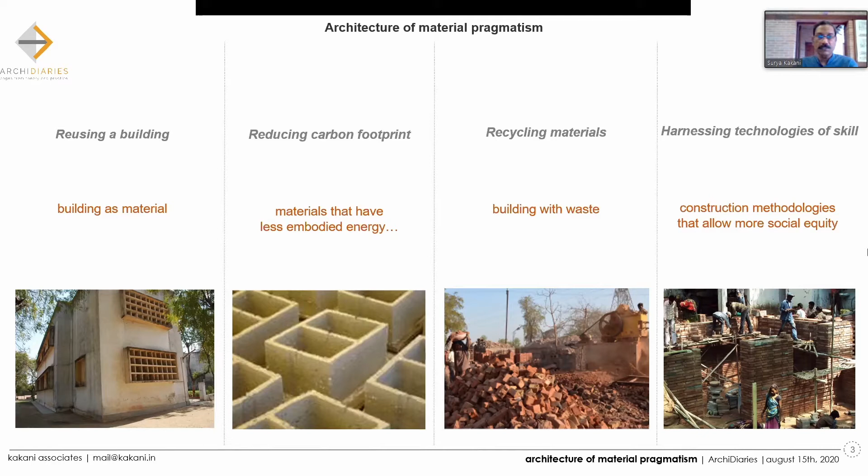Do we get it industrially produced, which definitely has a value of its own in terms of certain efficiencies of scale, but there are at least 60 to 70% of construction that still could use skill which is embedded in our culture. So I'll start with the first one, and for every particular title I put together a couple of examples.

So I'll look at these examples, explain these examples, and hopefully it will express some of the concerns that we've tried to embody in the practice.

So this is a project called the Venture Studio, in Ahmedabad University. There was an old building in the university, a very classic old building in the sense that it's a modern classic, a 1950s load-bearing building, quite large.

If you can see my mouse, this is the old building here, very close to CEPT University, in the Ahmedabad University area. At the back of the building there was a portion which wasn't being used, and the University wanted to set up what is technically called an incubation center, which they called Venture Studio.

We were asked to see if they could put this old building to use. This first slide you see is the old plan, and what we did was build a plinth around the building.

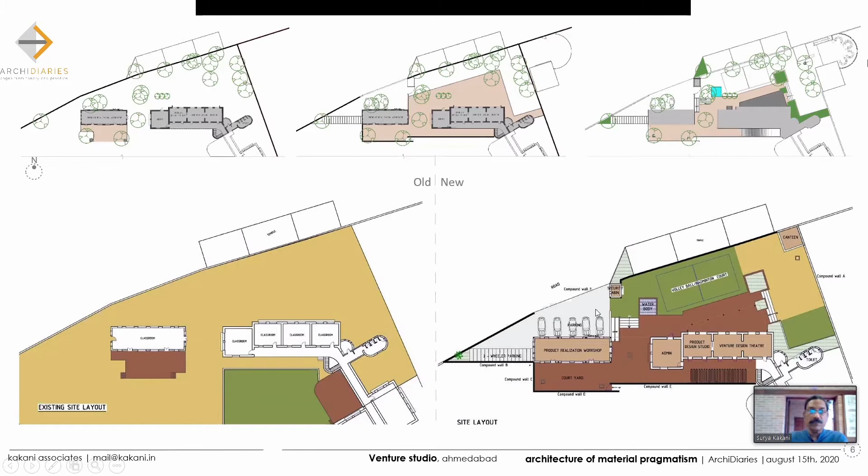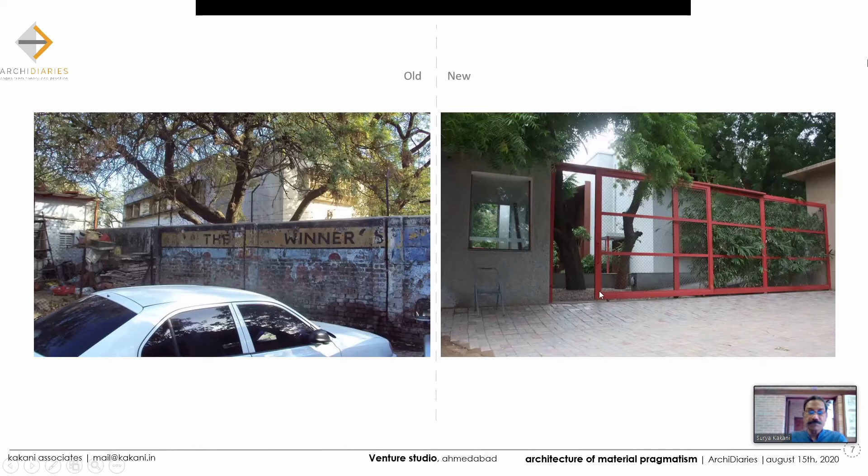The left side is basically the old shot, and the right side is the new shot, a similar close-up. So there's a plinth that comes up, and a shade that comes up on top connecting the upper floor. As you go forward you'll realize we've opened up the windows on top to look down into the lower floor - it's more like a veranda, creating a double height connecting the two floors, useful in an institutional setup.

A small entrance was created, with a small chhaja put up, making a small entrance to the office.

So this is the old building, which had a beautiful jali. This old building was done by the very famous Ahmedabad architect Atmaram Gajjar, who has to his credit some of the most beautiful buildings of the 1950s, one of the largest practices in Ahmedabad, with solid load-bearing buildings that had a certain repose in the way they stood.

Now all that we did to this jali was paint it deep maroon red. It's on the west of the facade, and it has beautiful light on the inside.

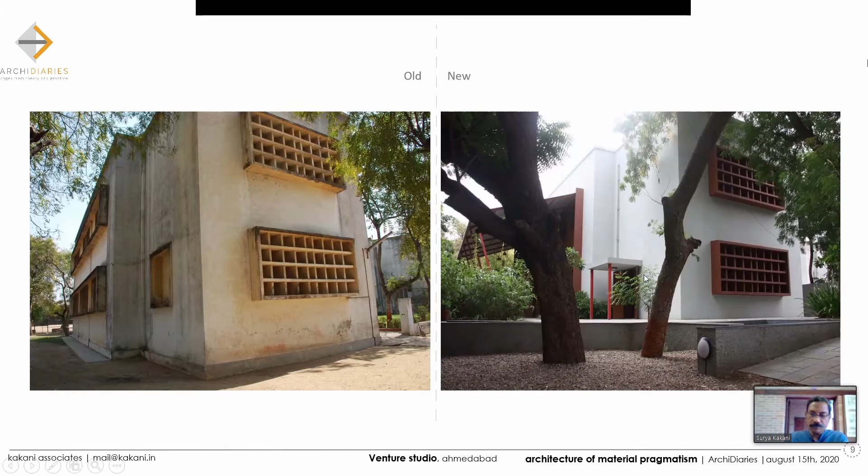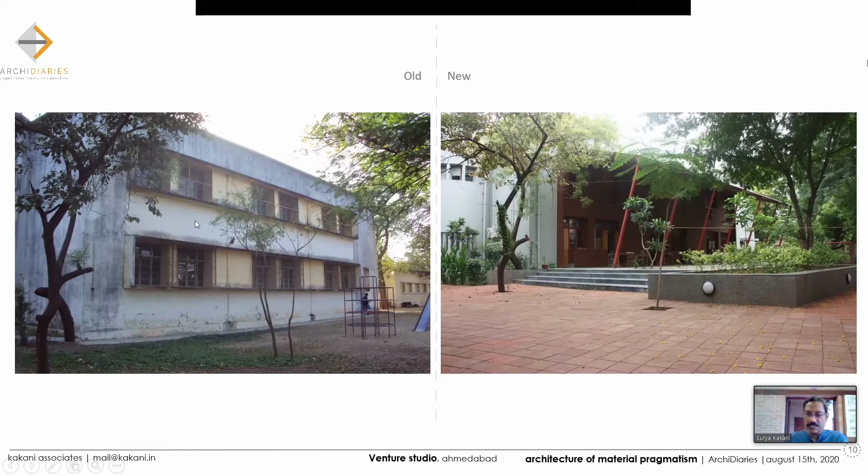As we move forward, it had a typical chhaja that went around the windows. We put a shade on the top and removed all the chhaja, taking advantage of the top chhaja to extend a shade. On the plinth, the upper floor windows were pulled down to the slab, and they could open up.

This is the court, which was originally the court, now the back for this building. We raised the level of the ground to meet the corridor, so the corridor extends and doesn't become a linear space, but becomes a rectangular space that is useful.

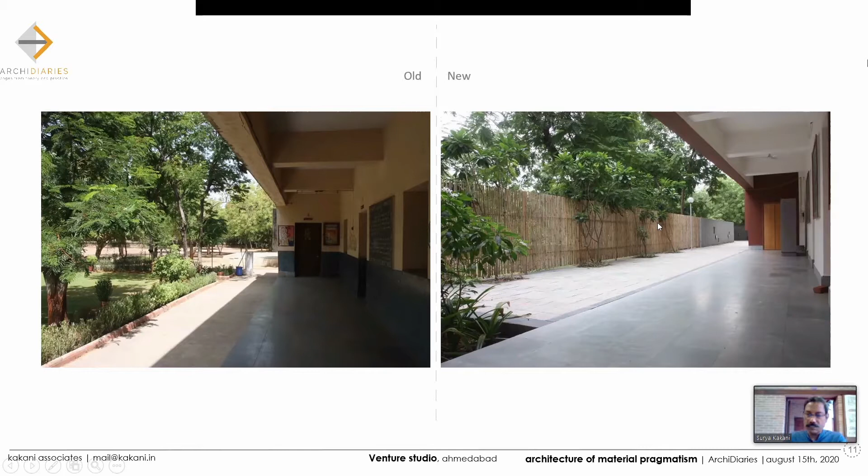In winters, this is the south side space, so you'll find people sitting here to work. We made a small bamboo jali that cuts this off from the other parts of the university for security.

So this is what I was talking about earlier, the upper level windows which open out. This shot on the right is the lower level, and this shot is the upper level. If I go forward, you'll realize what we've done is basically open up the windows.

To become part of the veranda created on the north side. The old windows were reused - they are metal windows, which we reused and just put doors in that.

So this is the inside shot of the room, and this is how it now looks. On the lower floor, it opens onto the veranda directly, so you can access the veranda. On the upper floor, you can overlook the veranda, so there's a connection between the upper and lower floors. This is how it was and how it is now.

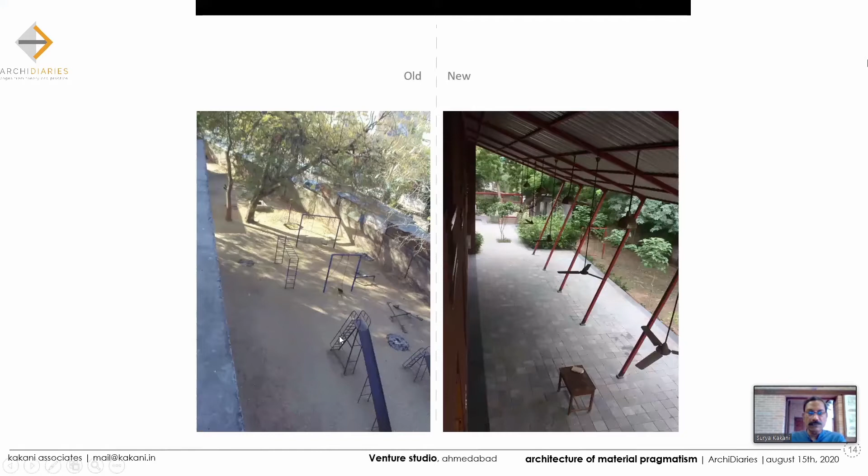The next is our own house, an old house, about 1980, early 80s to late 70s. Housing board construction in Ahmedabad, basically parallel walls, a simple box, which we stayed in for about 10 years. We redid the house since it was in bad condition. We strengthened it a little and reorganized the functions of the place.

On our north side, we had IIM as our neighbor, so we opened up the house onto the north. We made a court out of the compound wall. Basically, the margins, in this small 250 square plot, take up quite a lot of space. So the margins ended up becoming our courts, which the house began to open into, as you can see here.

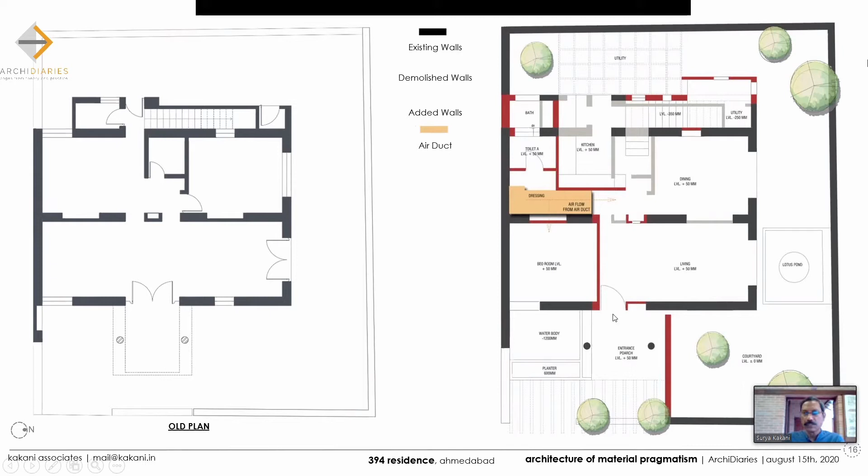On the upper floor, we added one floor on top. On the second floor, half of it is a terrace garden and vegetable garden. On the other half, we've connected it into rainwater and solar systems, which collects rainwater for us. For the last 10 years, we've been using rainwater for drinking and cooking.

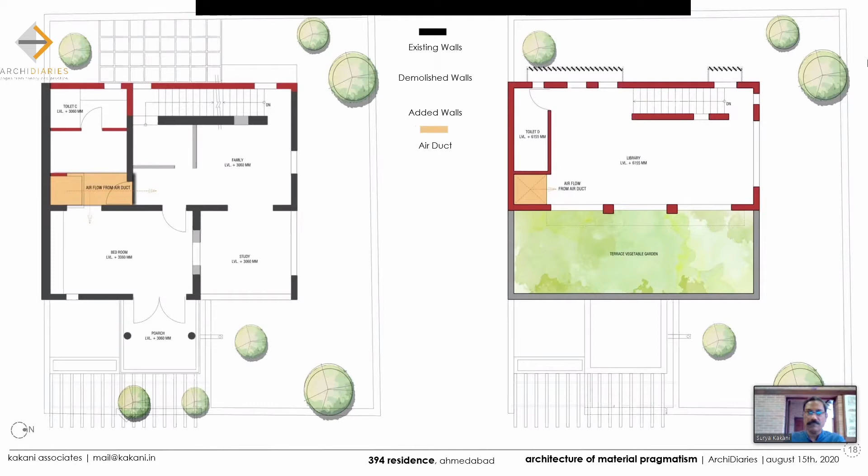So we removed all the old plaster and made lime plaster. We added a passive cooling system, basically a wind catcher on top with a wind tower, which opens into all the rooms. This is the drawing for that on the right side.

Even when we were curing the house, we found a simple system. Traditionally, what we've seen is people take a hose and start watering, filling the whole place with water, wasting a lot of it. So we put a small sprayer, the kind farmers use for pesticides, filled it with water, and could spray water. With minimal water, we could actually cure our walls, and a lot of water is saved that way.

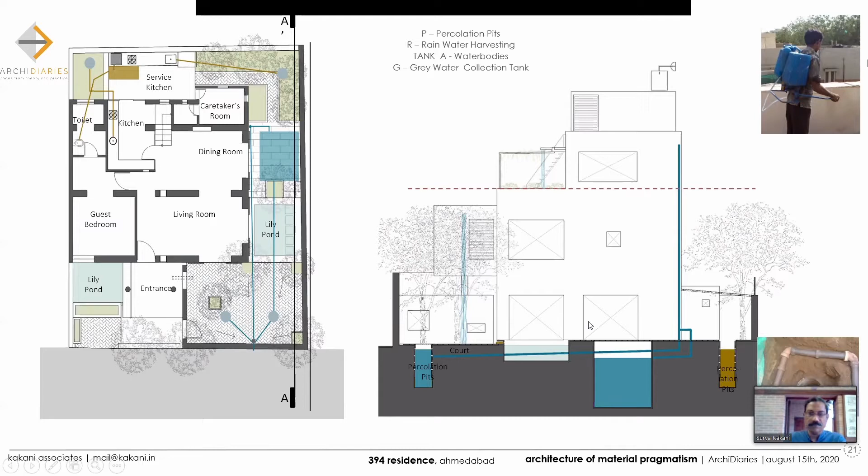Similarly, a lot of water from the basin goes into recharging the soil, basically through leakage, through detailing that allows leaking pipes. This is how it is.

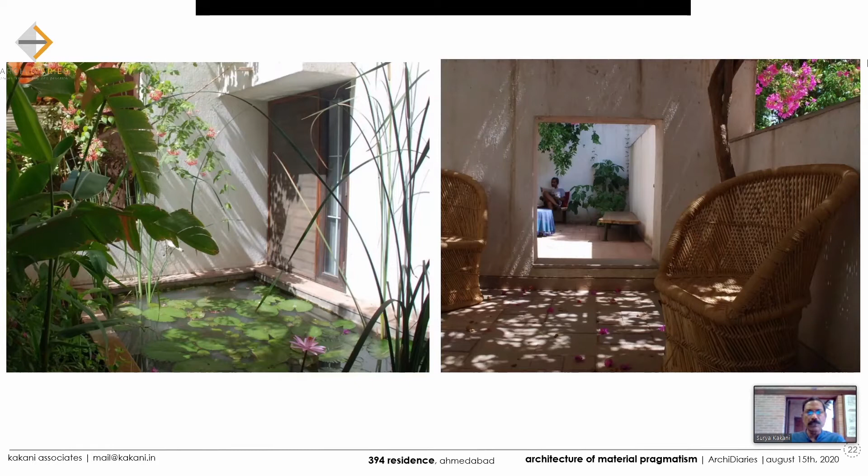We had a couple of small water bodies and thick lime plaster, and this house used to have three air conditioners. Since the last 10 years, we don't have air conditioners. We are pretty comfortable, except during the peak humid season of about 15 to 20 days during the evenings, around 5 to 7 o'clock until about 9 or 10 o'clock. It's a little difficult because of high humidity, but once you cross those 10 to 15 days, the rest of life is great. These are very old photographs, so some of the plants and trees have really grown up now.

So yeah, that's the house, which is basically about reusing the buildings.

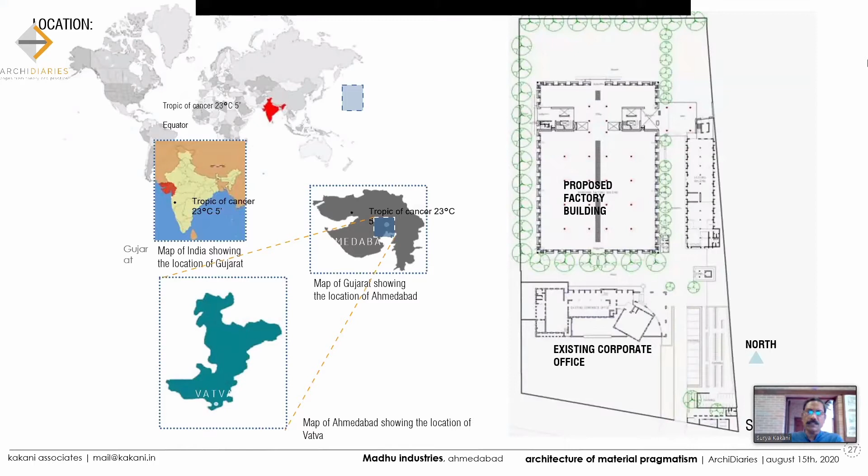In an industry we did about 15 years ago, we had a large span of 50 meters by 80 meters, where Himanshu Parikh was our structural engineer and Chamanlal Gupta ji was our consultant for passive cooling. Himanshu helped us relook at structure in a very interesting way, looking at load bearing with fresh eyes and the possibilities of what it can do.

So this is a 50 meter by 80 meter span. On the outer edge, he was able to remove the columns and gave us walls, and because it had to be load bearing, we were able to turn the walls into ducts.

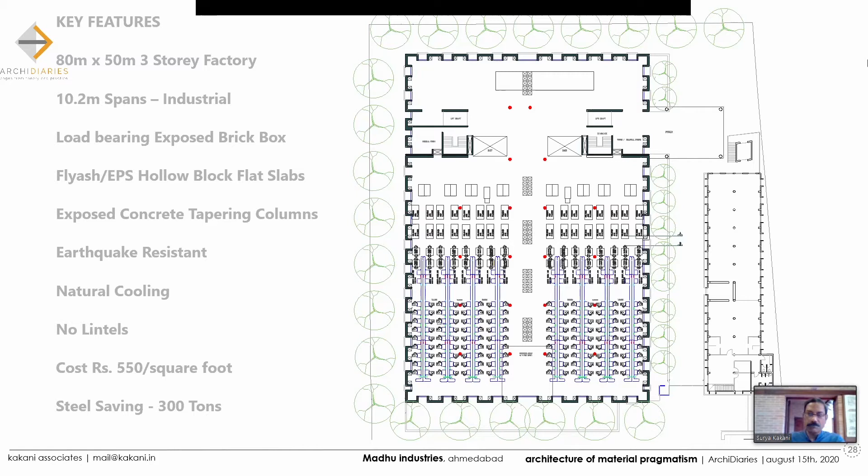The whole outer skin of the factory became ducts that pushed fresh air into the building, and in the center was a court with skylights and ventilation systems on top, which move the air through the building. We have a lot of things in this building, from hollow block slabs to reduce concrete, to using thermocol waste to reduce weight, to fly ash, to rice husk on the roof terrace to reduce weight and create slopes. There are a lot of experiments done on this building.

Absolutely wonderful experience with the client.

These are all these various things, rice husk on the roof to create slopes, because with a 50 meter span, from 25 meters of span, when you have to remove rainwater towards the outer edge of the building, the slopes you need on a flat slab are quite high. We found that rice husk is a light material, and because of that, we could actually reduce the strength in the concrete in terms of steel.

Otherwise, engineers are prone to designing slabs keeping in mind waterproofing, and that also increases steel in the buildings.

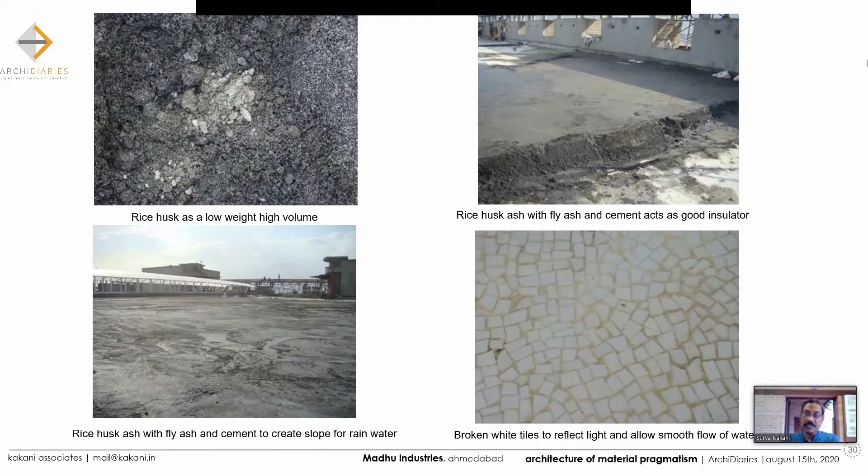We mixed bricks. We needed about 15 to 16 lakh bricks, I remember. We used about 1 to 1.5 lakh red brick, and the rest is all fly ash. The idea was to minimize our needs in terms of aesthetic, so we mixed up bricks. The red bricks are at a little higher intensity at the bottom, and they reduce as they go up, so it becomes a kind of character of this building.

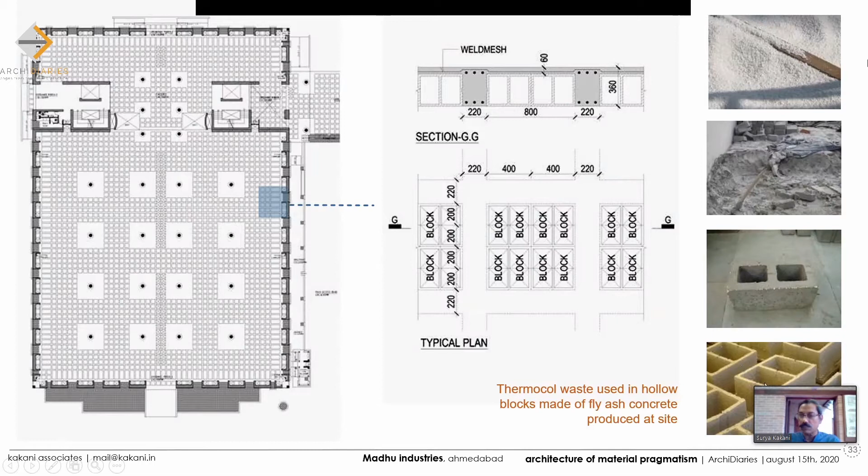When we started, we had to get this kind of thickness in the hollow block. By the time we finally decided the block, we were able to reduce the thickness of the block wall to about half an inch, which gave us a huge economy.

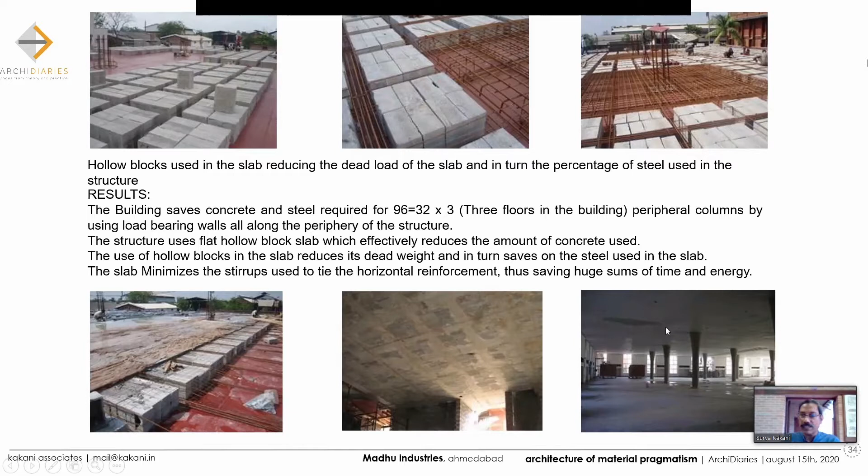This is how the blocks are kept, and this is how you get a flat ceiling on the bottom. Now the advantage of flat ceilings is you can see the kind of light you get into the space. The idea was that we didn't use any lintels, so the light reflects on the slab and moves quite deep in.

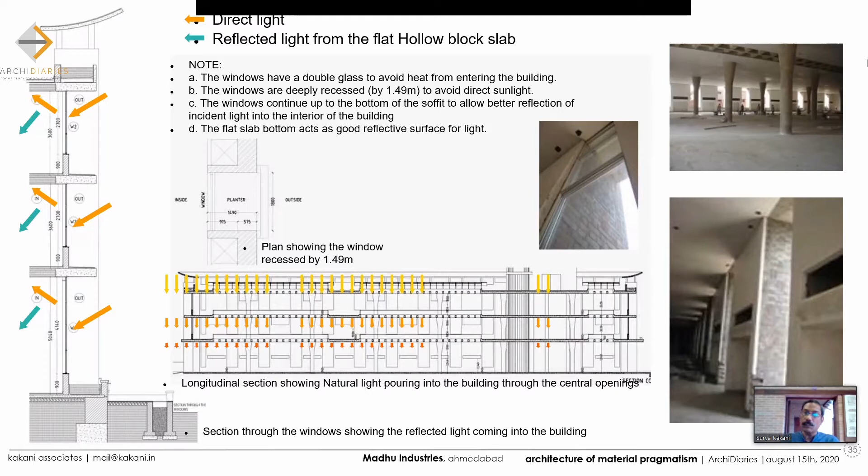You can see in this photograph here, we were able to get a very nicely lighted space, 25 meters deep to the center, and the ambient light requirement reduced dramatically just by simple detailing of the openings - deep set windows all the way to the top, roof to top, but deep set to save them from heat.

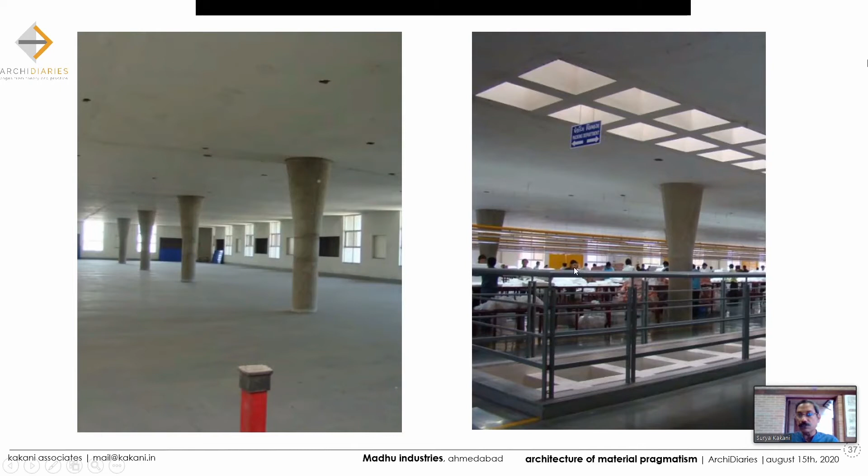That's the sense of the space. That's the ducts that remove the air in the center, and that's the kind of ambient light one gets. It's an industry that produces fabric for Scandinavia, so they have task lighting very close to the tables to reduce their power requirements.

This is basically - we tried various experiments in that building. For misting, Chamanlalji was an amazing support. He's a physicist, and he helped us figure out what level of misting one needs to do such that the air becomes cool and drops down, creating a downward movement in the space, a current.

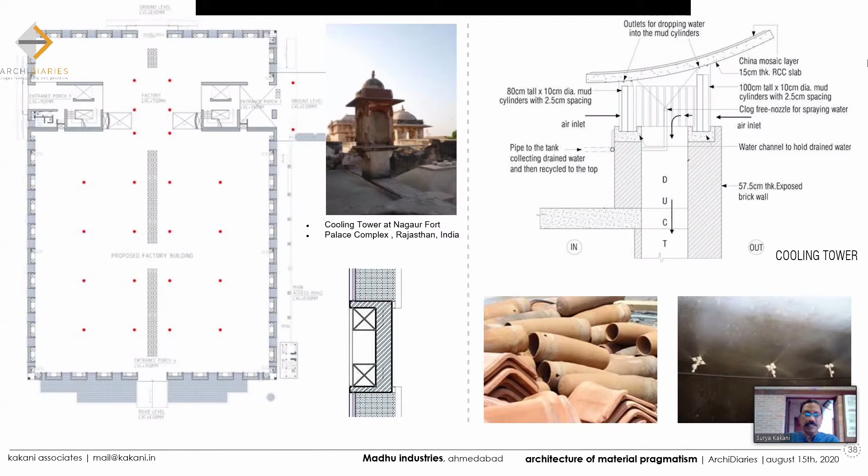And these are just examples of how old buildings in India actually used to do that long back. So it's not something we've invented, it's just that we need to use it at the scales we now need for industrial applications.

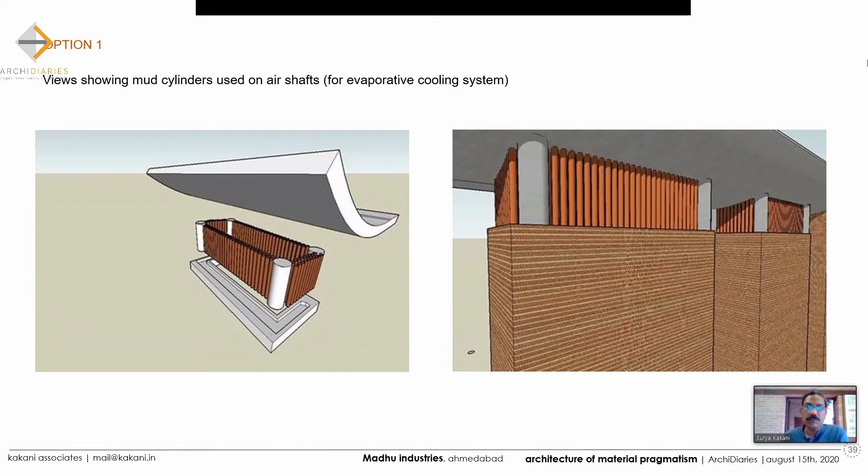This is one where we had done cylinders to fill up with water and have the breeze go through. We had some problems - we found they had fungus on these. So we did all these experiments over a period of a couple of months. We used bricks, we used terracotta, we even used Mangalore tiles.

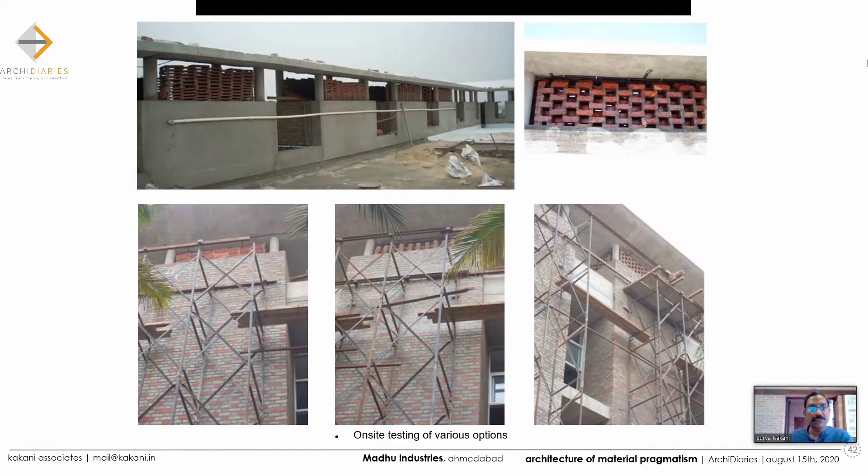Finally we ended up with bricks because Chamanlalji wanted a certain venturi to be created that would land into the duct and push the air down. So this is drawings of that. These are various experiments - we were measuring the airflow with each of these types of experiments on the roof before we settled for the kind of system that went in.

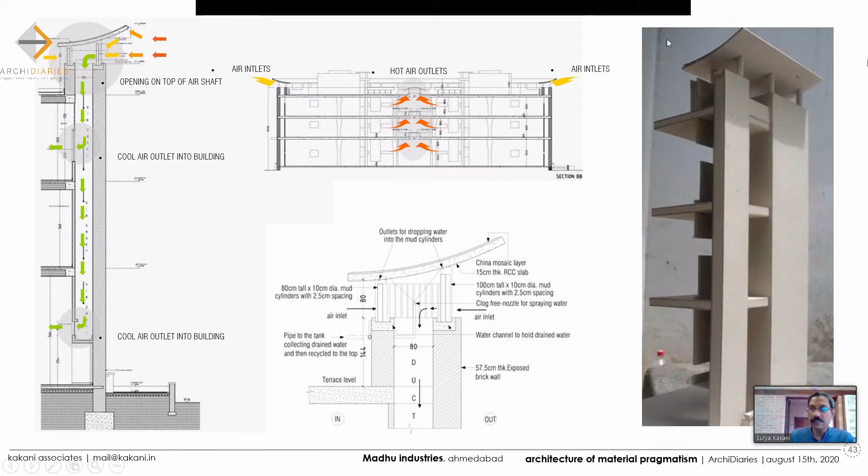So this is the duct that goes in. The air falls because of getting misted, it loses temperature, and cold air tends to fall down into the duct. Each space has openings with louvers, and there are exhausts, whirlies, and electrical exhausts that move the air out to the center. That is a section of the duct. This is the center - this is the whirlies in the center and the ducts that allow the air in.

Now we've actually had to increase even the air outlets, so exhausts have also been added. Electrical exhausts have been added on 2-3 ends of the duct to increase the air output. So this is the building, this is how the building looks - deep set windows, 3 slabs of 16 feet, 12 feet and 12 feet. A terrace, that's the parasol on top that covers the duct.

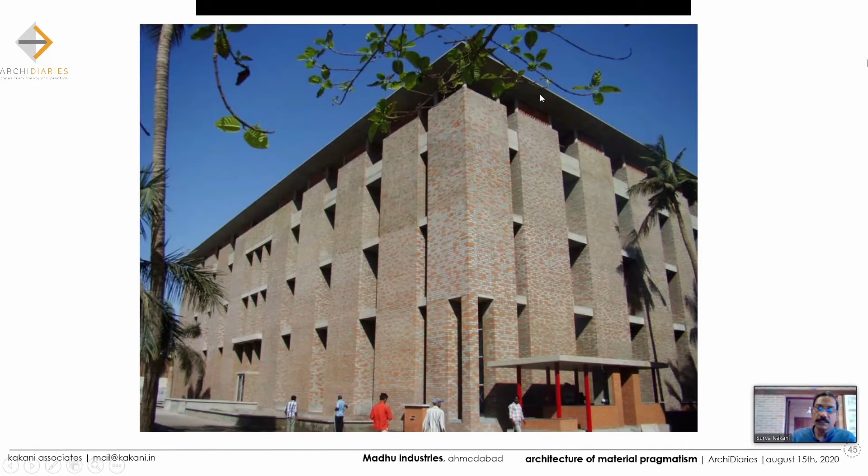Then there is a school that we did in Rajkot. A very close friend of mine, Yashin Vibhakar from Rajkot, no longer in Rajkot now, but we worked together on this project. Post earthquake this school wanted - actually it wasn't about the earthquake. We had done a school in Ahmedabad which had some bamboo work on it, and the client wanted to use bamboo initially. Then the earthquake happened, and we found the client's cousin, a contractor, was already using some waste in building compound walls.

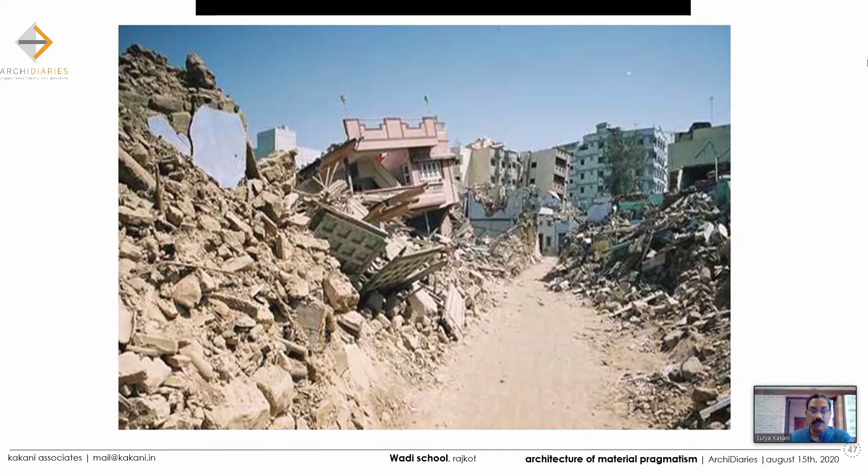And we said, why can't we take this technology forward? Bamboo is a lightweight material, so the walls don't need to go through a huge stress of load. So this is the large school, it's outside Rajkot, called the Wadi School, Galaxy system of schools.

Basically it was supposed to be an extension campus where students would spend 2 weeks a year doing other things without books. But over a period of time, they've converted it - I think sometimes that's the fallacy of success - this has now become an international school, so it actually operates as a full-time school.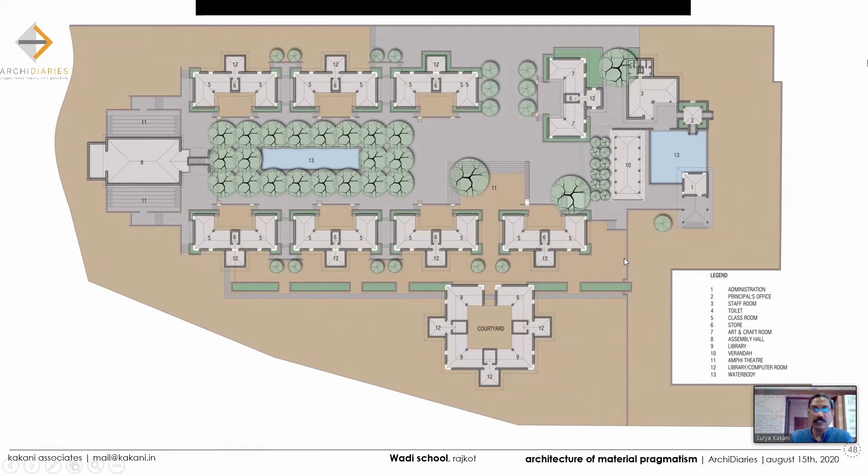So what we did was we actually got fly ash from the thermal industry, gypsum from Than, which is basically a ceramic industry, and lime from another place, Mithapur, the Tata Chemical Factory. That mix, along with some binding cement, blocks were created and cast on site, walls built with the broken rubble. The metal was sourced from Alang.

The pipes, the bamboo, partly came from Dangs, and partly - the tragedy is that most bamboo, whether we like it or not, ends up coming from Assam and far off places. So that's some of the reasons why we have reduced certain kinds of bamboo use. When you want large, thick, hollow sections, they end up coming from far away. Solid, small, thick sections are available in and around Gujarat, so one has to imagine the kind of bamboo to use depending on the local area.

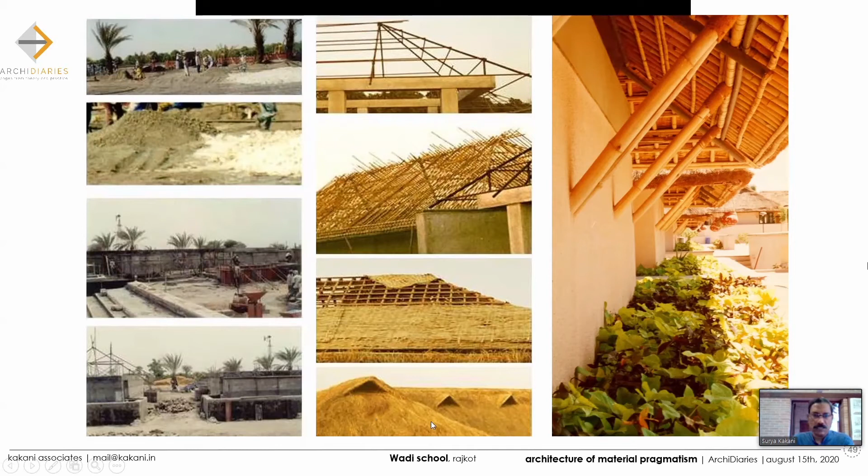So this is basically bamboo on top of the metal structure, covered with mats of date palm, covered with thatch, which is a grass available in these parts. So that's how the school was built.

I'm very sorry about this - this is about 2002 or 2003, so these are 17-18 year old photographs. Please bear with it, I had some photographs but couldn't locate them, so I just settled with the old photographs.

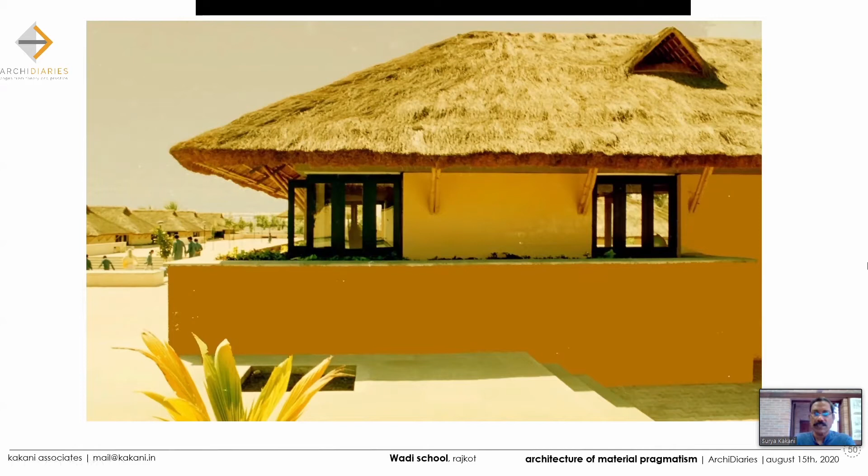This was basically a simple idea of a plinth and sunk areas - we just raised a plinth, cut and filled, and the classrooms emerged. So the scale of the classes when walking on the plinth is very beautiful for the children, who feel they can actually touch the roof.

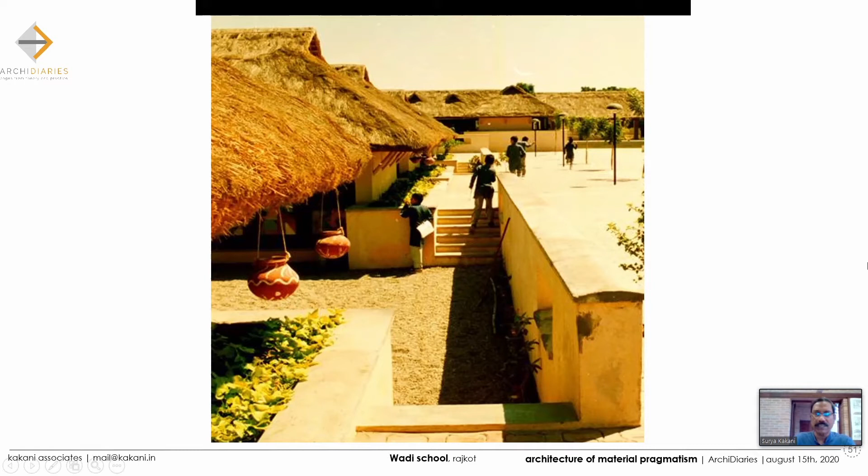So these are trees that have grown - this is now a large campus, with all the recessed windows and courtyards. The idea of a large amphitheater with a huge banyan tree - this banyan tree has grown huge here and covers this whole amphitheater.

So the idea of playing with scales became important because it was one module that we just repeated. It was actually a simple cut and fill with a singular module, and the rest is all a play of scales. This is how the classrooms open into the courtyard before you step out onto the plinth.

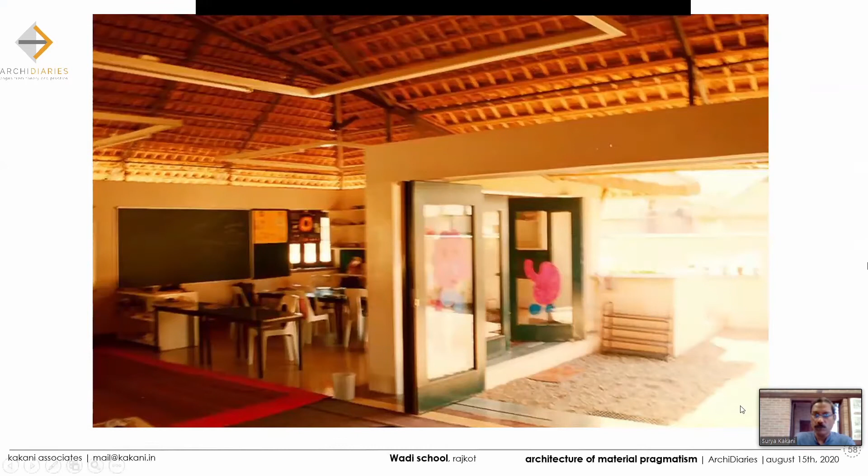That's the corners opened up.

Over a period of time, there's a very good friend who's been working since a long time, since we started our practice 25 years ago. Keyur from Kesarjan runs an industry. He also passed out of the School of Building Sciences at CEPT. He started out thinking about looking at waste as a potential building material, 25 years ago, when nobody was thinking about that. He started with fly ash, and we used his bricks right from the beginning. We were probably one of his first clients and continue working with him. He's been great support to us in our experiments.

So once when we were working with lime, he looked at lime too. He's actually done a lot of work with lime now, and it's now available. Earlier lime was not available; now he's producing lime in bagged systems and sells it, which is otherwise a very complex process.

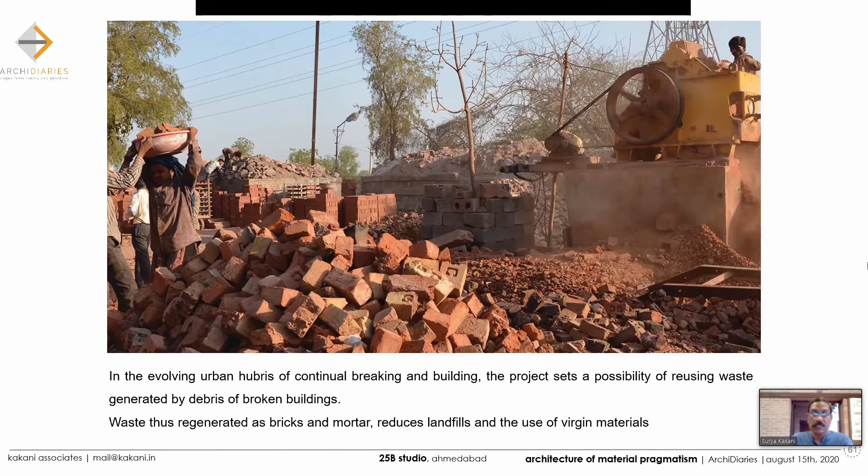This brick waste, he's actually converting into bricks. These are the bricks that he produces at his factory. Various experiments were done, we used it before, and finally we were successful with him, and he was able to produce this brick for us. It's got basically waste brick, lime which is also from a waste industry, some fly ash, and cement as a binder. This is a compressed and water-cured brick.

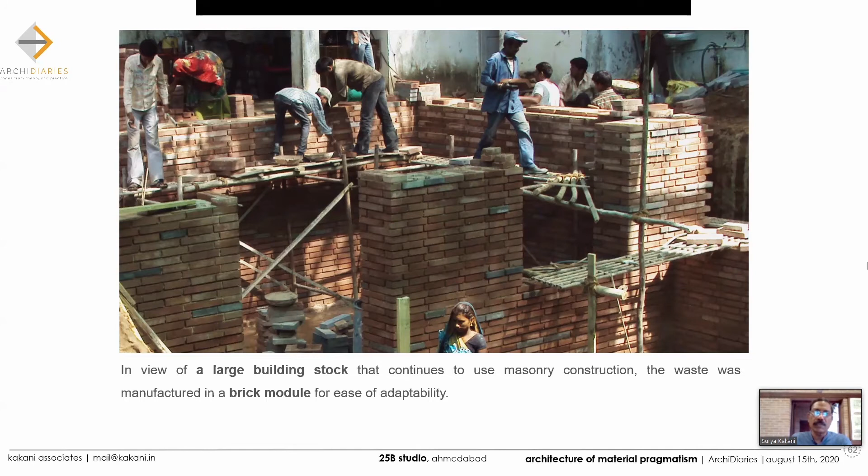This is the office that we were building. The idea is that a lot of building waste is generated, which can potentially simply become rehashed into new brick modules and reused again. He uses a certain percentage of clay to give it a certain color and binding of the edges. These are all very small scale industries, and this is how the brick is produced.

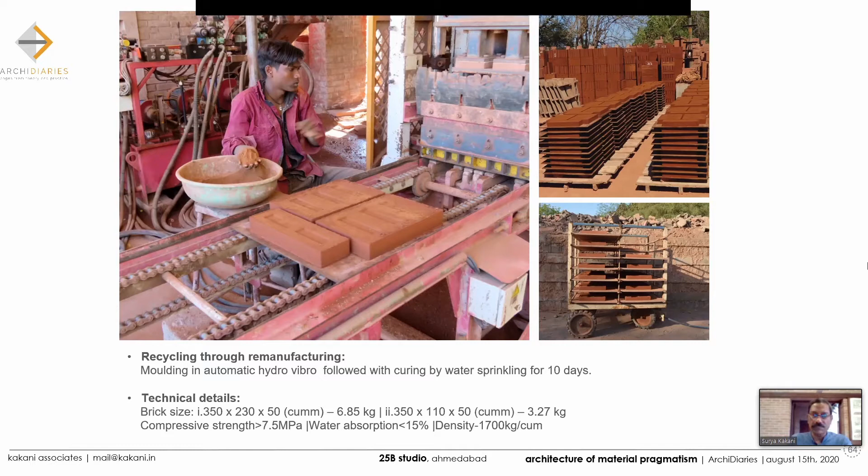It has a very good compressive strength, and the technicalities are all done. So we decided how to use this brick, and we had already used it as an experiment in paving in our house, and saw about 6-7 years that nothing happened to it. We tested it, and finally we asked Keyur to produce this brick for us, and we said we should build a building in lime, and build it 4 floors, because post-earthquake, even for a 10 by 10 room, people were building 4 columns at the corners with concrete columns.

We said no, let's build. Thanks to Himanshu Parikh, we've been building large load-bearing buildings up to 3 floors. So we said, let's do a lime building with 4 floors. We tried various experiments for the horizontals, but couldn't let go because of earthquake issues. We did concrete slabs for the horizontals, but the rest, everything vertical, is lime in this building.

In fact, the building I'm sitting in and speaking to you right now is my office, our office. So this is also the idea of an architect and the architect's office. We said, maybe today we are here practicing this. So as an architect, do I design a building that is so specific that if today it's not an architect's office, what happens to it later? Does it have to be demolished?

Or can we as designers produce spaces that can be multifunctional? So today it's architects, tomorrow it's something else, the day after it's something else. I think this is the role of a designer, how spaces can become multifunctional, how architecture can address these needs as much as addressing all the other incumbent needs of the immediacies of program.

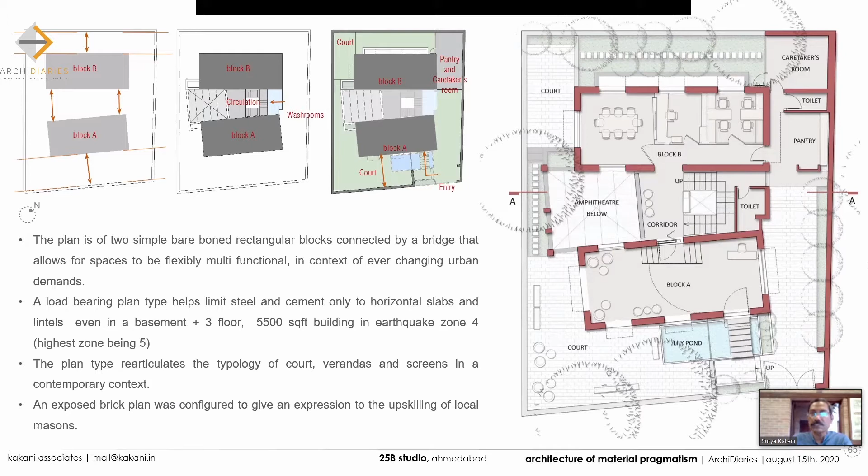So this was a simple 2-block building with a courtyard, which became an amphitheater. This is how it is organized. The gray bricks have been allowed to pop out by about 3 centimeters.

So a simple building, all brick, with lime mortar, no plasters. The idea was how bare minimum it could be. It's a basic bare naked building, as I would say. Brick exposed inside and outside, no plasters anywhere, concrete as it is, floors as they are, except in certain parts where we put wood on the steps and central parts. All wood used is saadhad, which is basically an old solid wood, used for support systems.

We bought old wood and rehashed it. This is all bamboo. If you can see here, we've actually put jalis. I'll come back to that later.

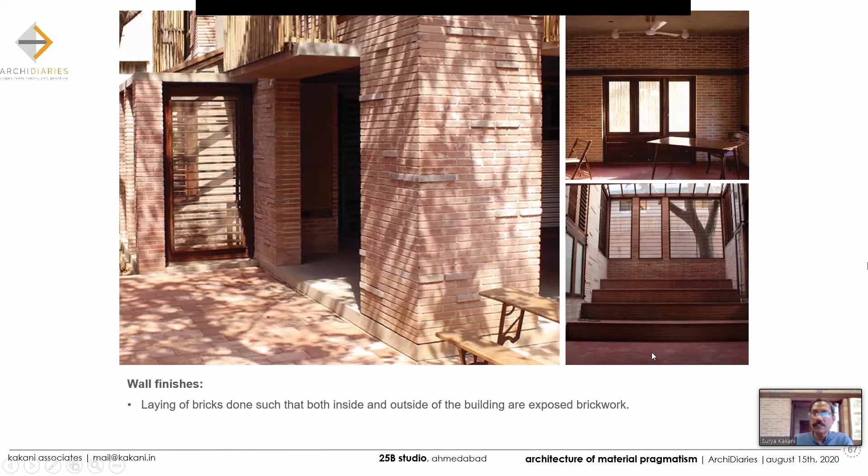So this is a small amphitheater which goes down to the basement, and that's where the studio is, opening outside, where we have our talks and other stuff that we share with the city.

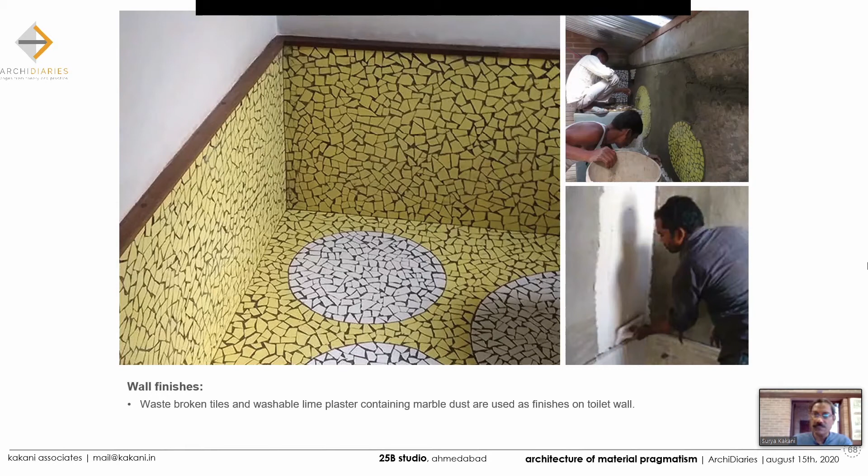So all the bathrooms are done with China mosaic, which is basically second-hand tiles that you break. Technically, you're supposed to have waste tiles, but people now break old tiles or second-hand tiles. There is enough skill available in these parts to be able to do this.

We also used a part of the bamboo as shuttering, so that you get a texture on the roof.

All the old wood louver systems are for ventilation. The office doesn't have any air conditioning, and there's a ventilation system that's been worked out.

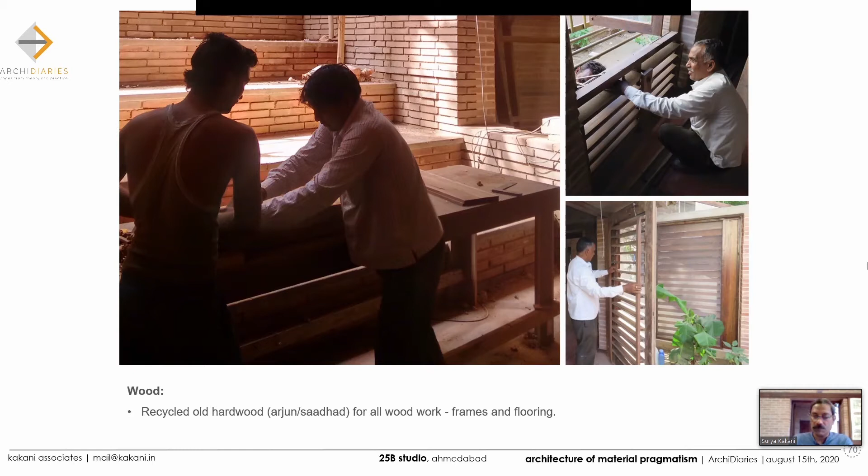For the floor, concrete floor, we directly put cement and red oxide with a 6mm layer, and we were able to just finish the flooring. We took extra care when we were casting the slab so that the levels are maintained well, so we could save a huge amount of material. Otherwise, normally a floor you'd end up having about 0.75 Kota and so many other materials coming in, whereas a good concrete floor can pretty much suffice the requirements.

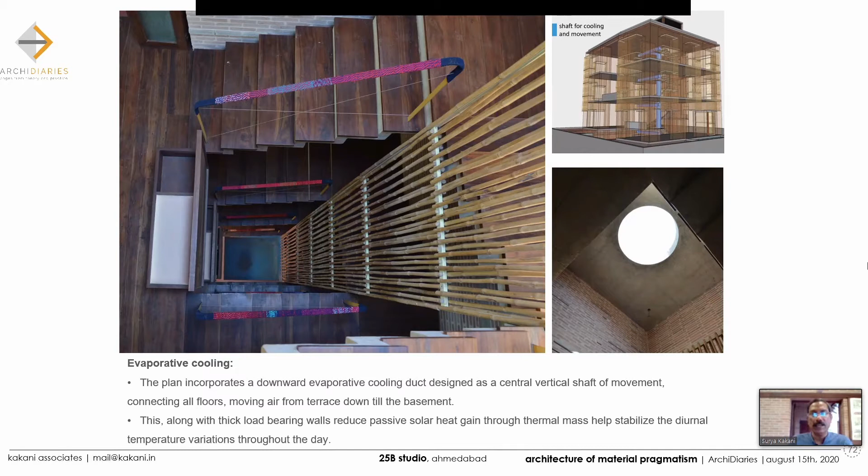So this is the central space, the staircase, which acts as the duct, where we've kept a cooler on top, a PDEC cooler - passive downdraft evaporative cooling - which throws air down this system during the summer peak months, floods the room, creates internal pressure, and pushes the air out of the louvers at the bottom of the windows.

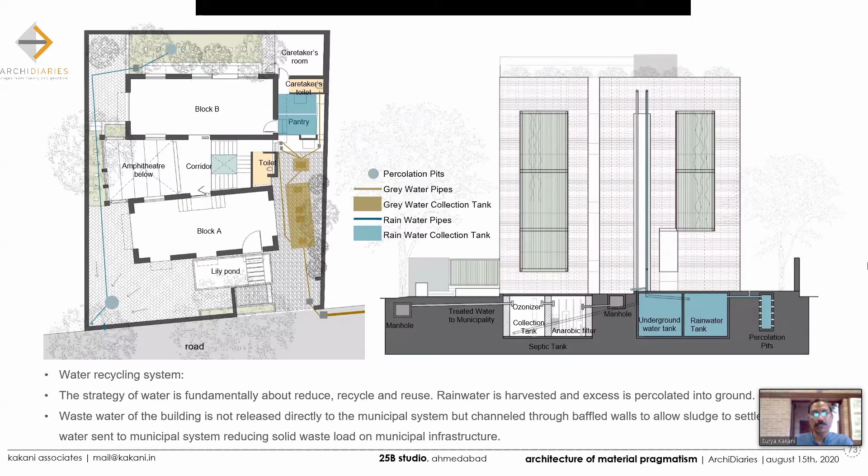The water is, again, a lot of systems have been done for it - I'll not go through it again. The rainwater, wastewater, we've done all systems. The whole office has solar on top, so technically we are net zero. We do not have any bills to pay. Though we do get water from the municipal corporation, we put up a system to reduce water outgo, and whatever we grow here uses that water.

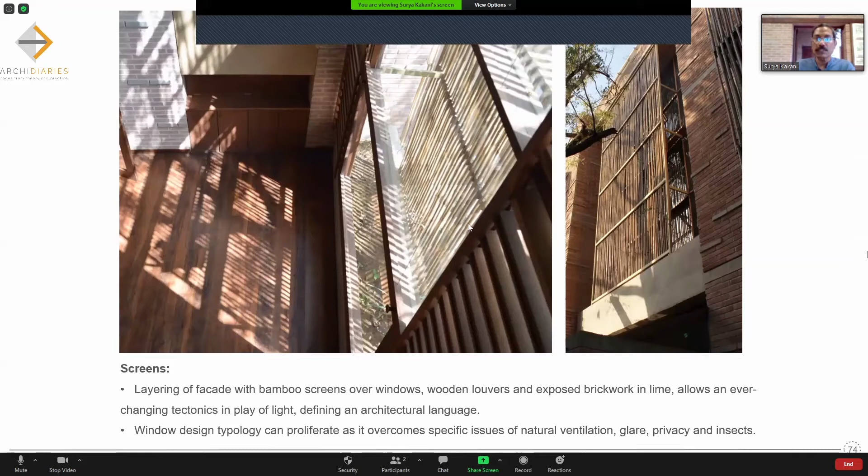So this is how the building looks. From the outside, the courtyard, the margins again become courtyard, the lower floor becomes a veranda. And this is how we use this space.

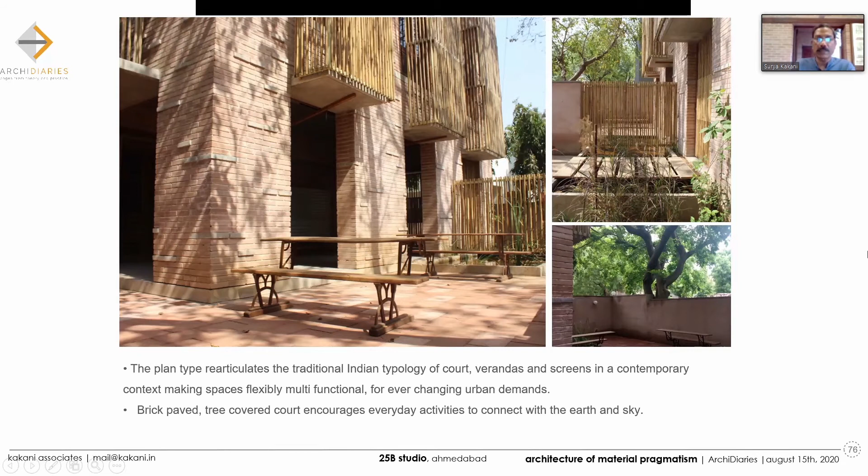So the idea was, how can we mainstream an end result as a credible contemporary alternative of a building type, which is easily adaptable to multifunction in the urban context. And as designers, we thought, along with looking at material and other things, could we also look at...

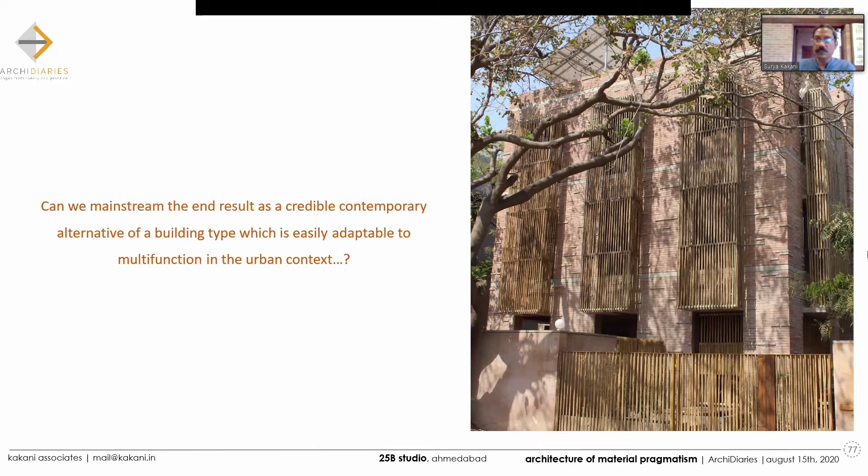So this is a lime building, 4 floors, basement plus 3, done 5 years ago. This is the last part - I hope I'm not overshooting time, Ayaz, please do let me know.

This is the last part, which is basically looking at technologies of skill. We started looking at horizontal spanning when we were doing the offices, and in fact we couldn't really do much, and we got delayed in our office. We lost 4 or 5 years, and we finally ended up doing flat slabs, but we continued that.

Finally, we figured that there are systems that have been done traditionally in the country, in the world. We came across these examples, looked at them in our own way and connected them, and used these systems in horizontal spanning. I'll share that quickly with you. This is again the same thing - we use the same bricks that KUR produces for us.

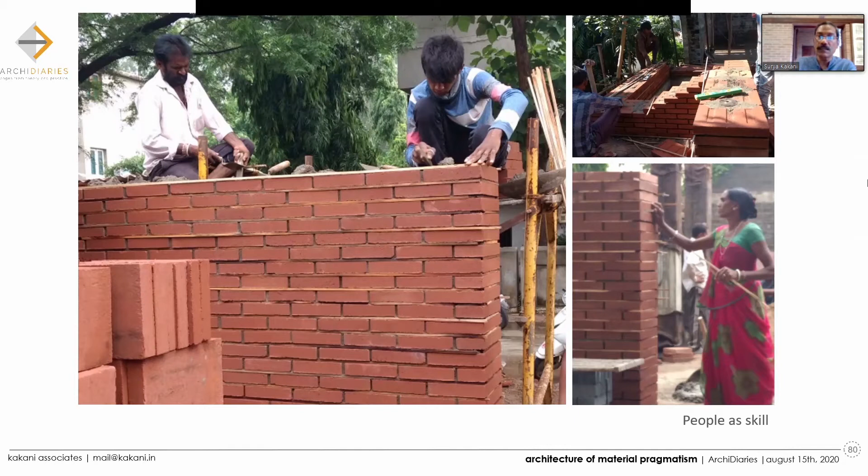So skills, when we were talking of people as labor - what kind of materials do we use in the context of our economies. There's huge skill, huge labor that's available, and it creates a whole economy and an experience that allows you to connect into various levels of our society.

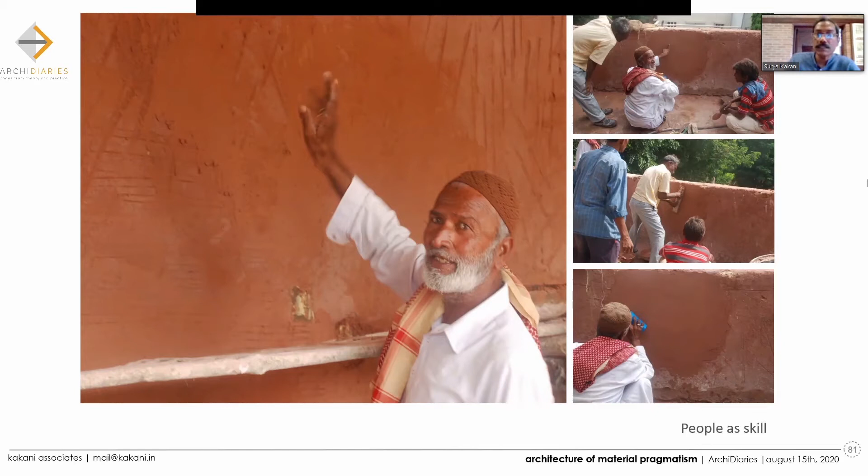This is an amazing person who was introduced to us by another colleague - he comes from Bikaner, and he has an amazing sensibility in lime. He taught us a lot about lime.

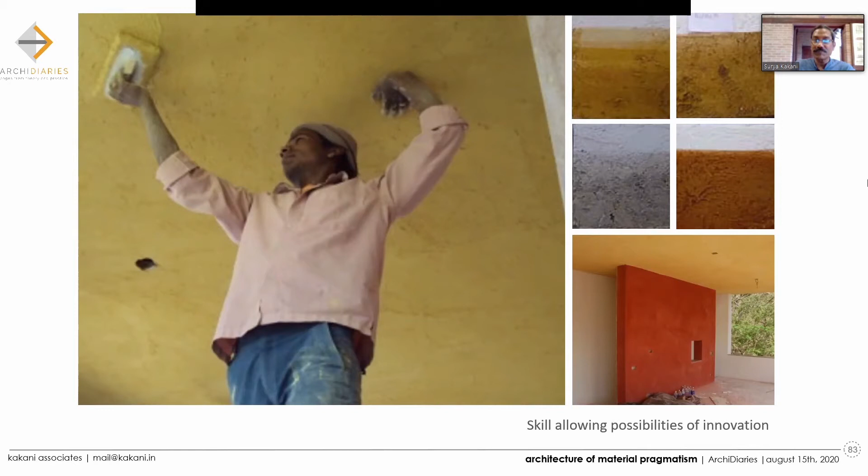We mixed various herbs and other things. My partner Jai has always been a very good critic, and we experimented with various herbs to get those colors.

This is just talking about skills again. All these kinds of things are possible because there are people who have the skills in this country. That's what I'm trying to say here - all these things I'm sharing are possible because there are skills in our tradition. That means people love to connect to the built spaces. Are we able to find new ways of giving them possibilities to connect into the new economy? I think as architects we can play a huge role in harnessing these into the new economy - simple, very simple but beautiful skills.

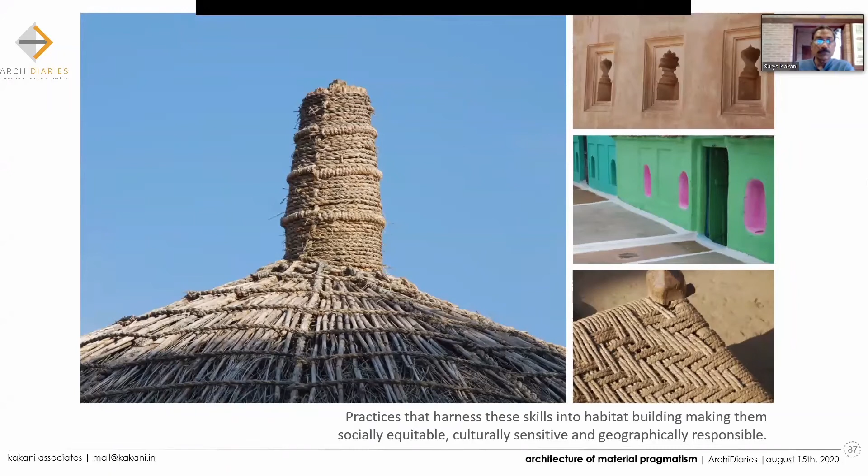So this is a building. I'll quickly jump to the actual things here, the horizontal spanning I want to share in this building. My partner Jai runs an NGO where she works with women in the villages and surrounding villages, teaching them various vocational skills for their living, economic skills.

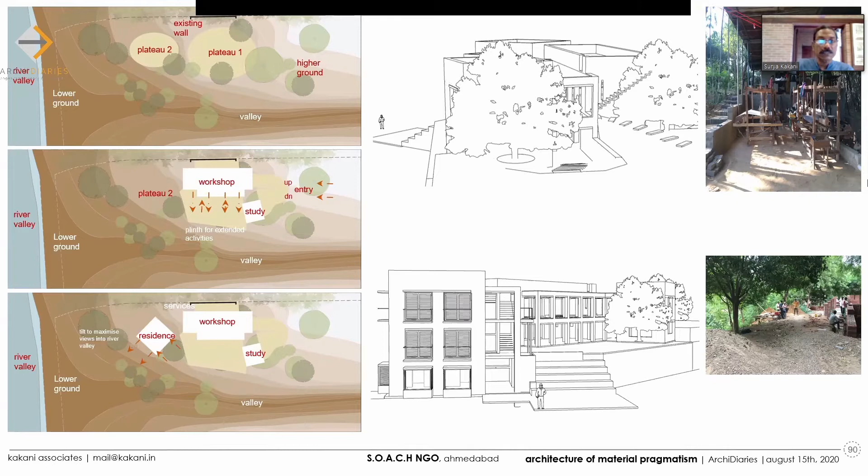And then we made these buildings where we're just about still getting there - they're under construction, nearly done. So this is what I'll share with you.

First one is a Timbrel vault. A Timbrel vault is a system the Guastavino brothers made popular, basically a Catalan system made popular by the Guastavino brothers in America - funnily, America, with large spans.

And then Ochsendorf, John Ochsendorf, a professor at MIT, discovered them and wrote a book about them. A lot of this material is available in books, and we've taken a lot of help from these various sources. There's amazing stuff on the net if one begins to search. Our intent was how do we simplify this so it can become an everyday thing - that was the struggle, and that's what I'd like to share with you.

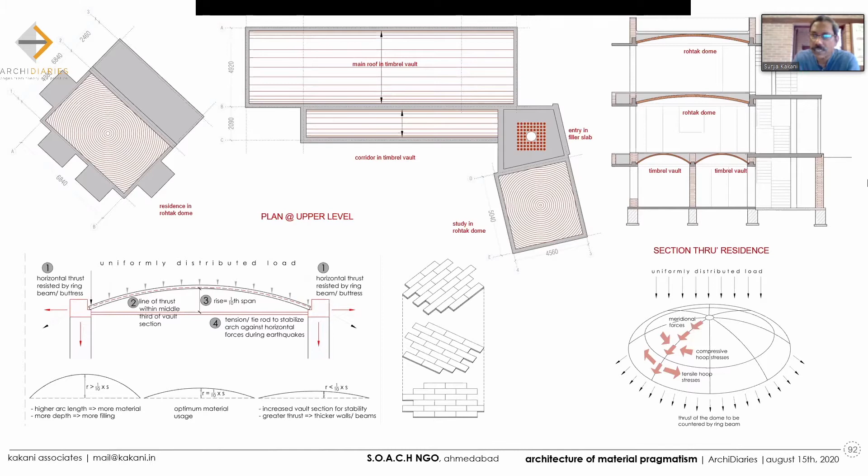We also discovered another friend of ours, Vikram, in Delhi, who introduced us to masons in Rohtak who were doing these very flat shell domes. I went and visited, and found it's an amazing system that needed to be proliferated.

So now, we did our experiments in our office. We failed a few times over a month or two, and finally we cracked it. This is the vault in the office, a sample vault, then we started on site with a small vault, then a large vault, and finally the really big one - 16 meters by about 4.9 meters wide.

Shell - if you go back you see these layers, this is how the layers come up. You can actually stand on top, and this is all done by hand by people and masons. These are products that are not specially made, they're available off the shelf - any city has what's used for brick cladding, when people want to clad their houses to look like exposed brick.

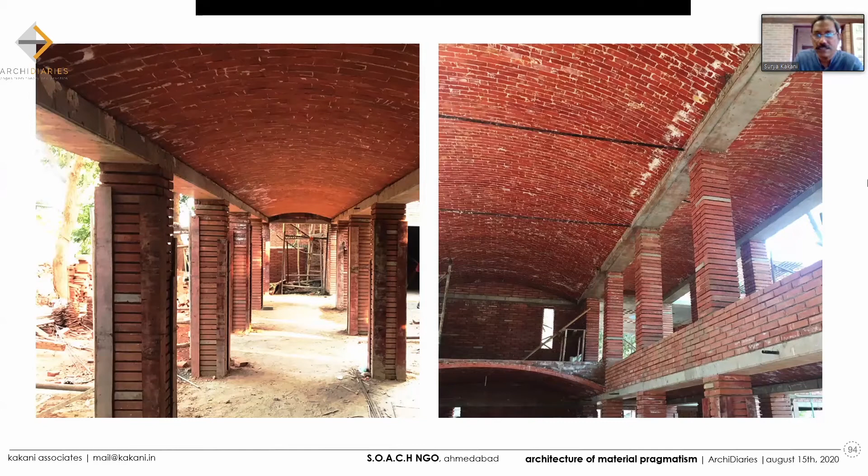These are half-inch, 10mm thick tiles - any Mangalore tile producing industry would produce some of these. These are again bricks for load bearing, and we have ring beams in concrete, so we couldn't get rid of it entirely. My next enterprise, hopefully at some point, is to remove concrete totally. In this one we put concrete as tie beams to reduce the thickness of the walls, because of the stresses and thrust that the vault or dome system puts on the sides. These are videos that I've sent.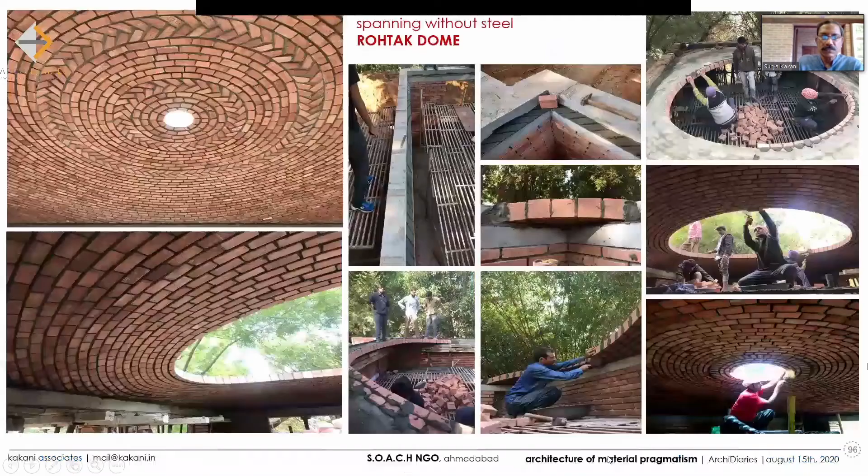So this is the other one, the flat shell dome, which we now call the Rohtak dome, because these people come from Rohtak - an amazing team of masons who over a period of time picked up these skills and make this amazing. It is actually an art, poetry to see them work, and as I'll show you in some videos, you'll realize they can do this at such quick speed - it's an amazing thing.

One has to see them work to believe this is real. I actually spent a whole day because I also couldn't really believe it, so I spent a whole day in Rohtak trying to figure them out, and I tell you, it was amazing.